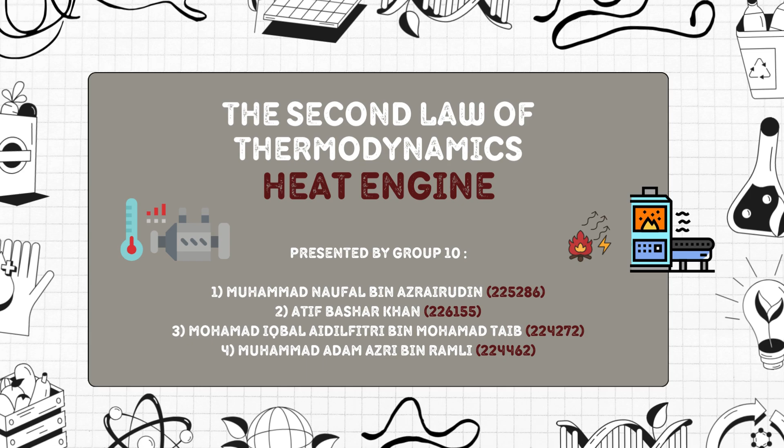So today my friend and I will tell you about the second law of thermodynamics with heat engine. So some of you want to know what is the second law of thermodynamics, right? Let me tell you. So what is the second law of thermodynamics?

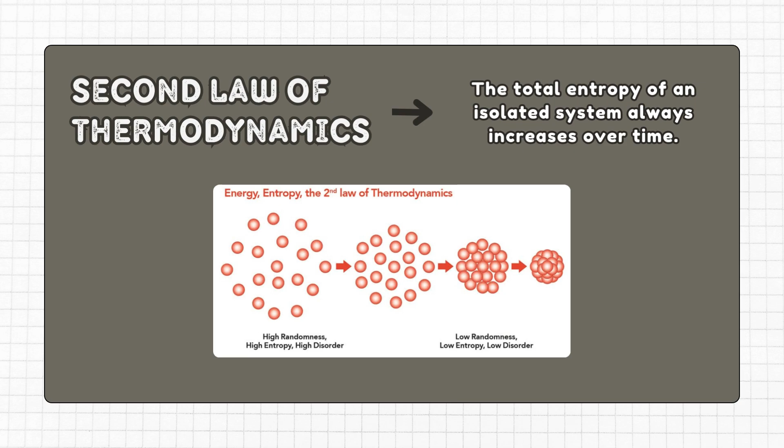The second law of thermodynamics says that the total entropy of an isolated system always increases over time, and energy naturally flows from areas of higher to lower concentration. Energy cannot be completely converted into useful work. Some of it will be lost as heat. Basically, the second law of thermodynamics is all about how energy moves and changes in a system over time.

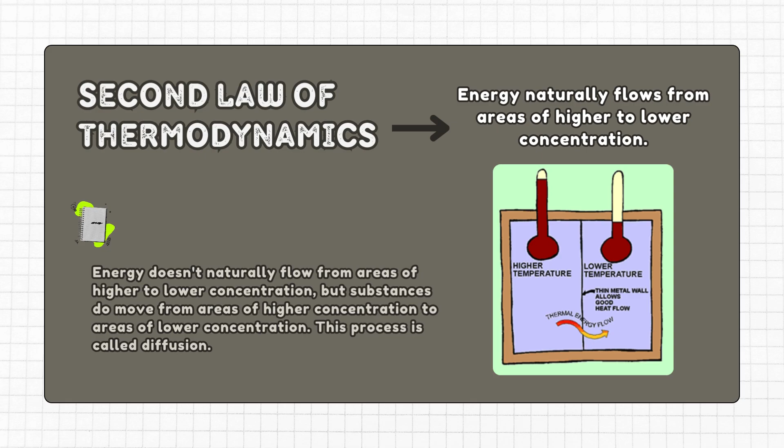One of the major uses of this law is direction of process. By using this law, it helps us to predict how and in what direction energy will flow. For example, a hot cup of coffee cools down to room temperature when energy moves out from the cup. Other than that, the second law of thermodynamics teaches us that energy has quality, not just quantity.

For example, a car battery that has not been used in a long time cannot be used. The energy is still there, but it has changed to waste heat. As for the theoretical limit for engineering systems, the second law of thermodynamics is a major help to solve engineering systems such as heat engines.

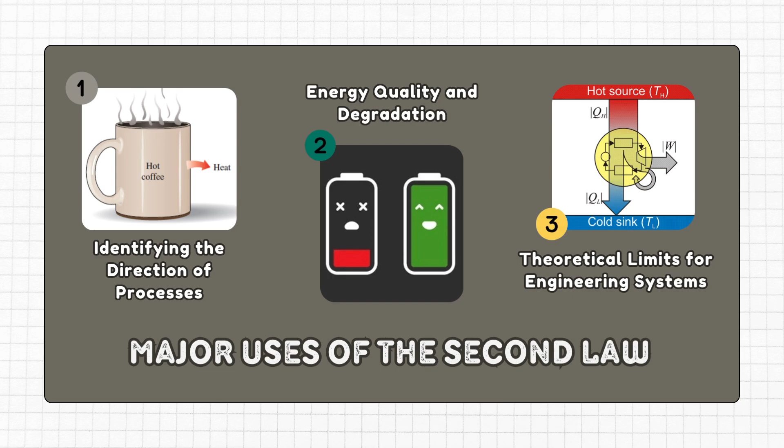In thermodynamics, a thermal energy reservoir is an idealized body with specific characteristics that make it essential for studying energy transfer systems. First, it has an enormous thermal energy capacity determined by its mass and specific heat. This allows a reservoir to store or release large amounts of heat without undergoing any noticeable change in temperature. This constant temperature property makes it a stable reference point for analyzing energy exchange processes.

In practice, thermal energy reservoirs are modeled after large natural systems. For example, oceans, lakes, and rivers act as reservoirs due to their vast ability to absorb and retain heat. Similarly, the atmosphere with its immense thermal capacity serves as another real-world example. These natural bodies are used to simplify thermodynamic models while maintaining practical relevance.

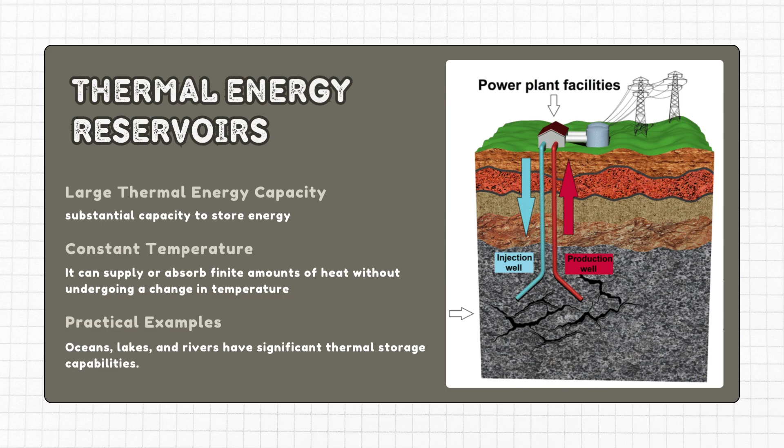Thermal reservoirs play a crucial role in systems like heat engines, refrigerators, and heat pumps. Heat engines, for instance, rely on high-temperature reservoirs to supply energy and low-temperature reservoirs to absorb waste heat, completing the cycle. Refrigerators and heat pumps depend on reservoirs to transfer heat efficiently between spaces. In essence, thermal energy reservoirs are the backbone of theoretical and practical thermodynamics, offering the stability and frameworks needed to analyze energy systems effectively.

Heat engines. A heat engine is a device that converts thermal energy, heat, into mechanical work. It operates based on the principles of thermodynamics and typically involves the transfer of heat from a high temperature source to a lower temperature sink. The key feature of a heat engine is that it produces work by using the energy difference between the heat source and sink.

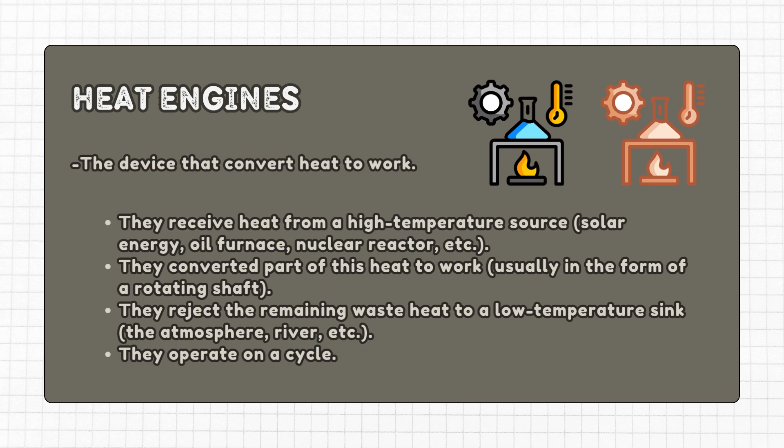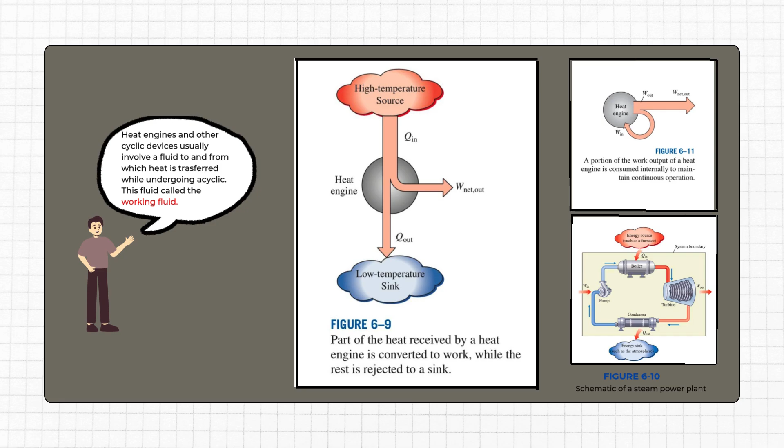Heat engines receive heat from a high temperature source. Heat engines take in energy as heat from sources like solar energy, oil furnaces, or nuclear reactors. This heat is the input energy for the engine to start its process. They convert part of this heat to work. A portion of the absorbed heat is transformed into useful mechanical work, such as turning a shaft or moving a piston. They reject the remaining waste heat to a low temperature sink.

Not all the heat can be converted into work. The leftover heat is released to a cooler place like the air, water, or the ground. Heat engines operate on a cycle. The process repeats continuously in a cycle involving heat absorption, work conversion, and heat rejection, allowing the engine to function continuously.

Now we move to thermal efficiency. What is thermal efficiency? Thermal efficiency is a measure of how effectively a heat engine converts the heat energy it absorbs into useful mechanical work. It is defined as the ratio of the work output to the heat input from the high temperature source.

Maximum efficiency is achieved when QC, which is heat rejected, is minimized, but due to the second law of thermodynamics, no real engine can convert all heat into work. A perfect efficiency of 100% is impossible.

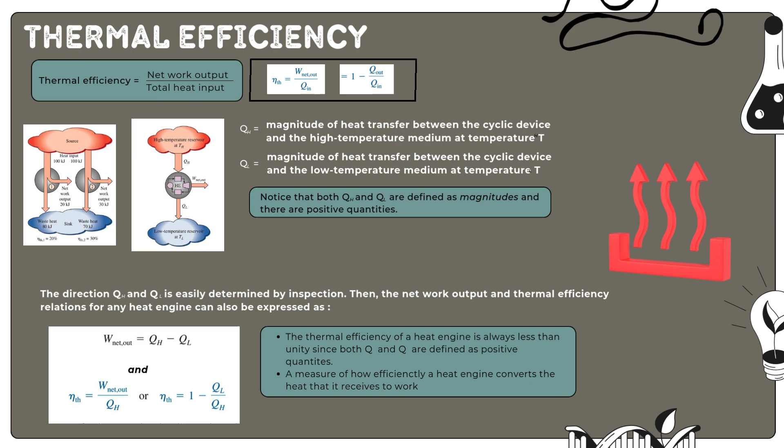Carnot efficiency is the maximum theoretical efficiency of a heat engine operating between two temperatures, TH and TC, which are high and low respectively. The efficiency is always less than 100% due to the second law of thermodynamics, which states that some heat must be rejected to the sink.

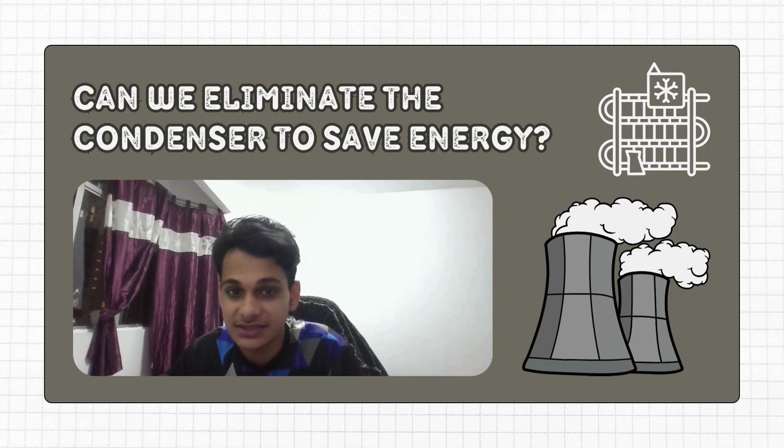In a steam power plant, for example, a critical component is the condenser, which you can see up there, where waste heat is rejected into the environment, typically rivers, lakes, or the atmosphere. This might raise the question, can we eliminate the condenser and save all that waste energy? Unfortunately, the answer is a firm no.

As illustrated here, every heat engine must transfer some energy to a low temperature reservoir to complete the cycle. This is a fundamental principle of thermodynamics. Even under ideal conditions, it's impossible to convert all the heat into useful work. Without the heat rejection process, the engine cycle simply cannot function.

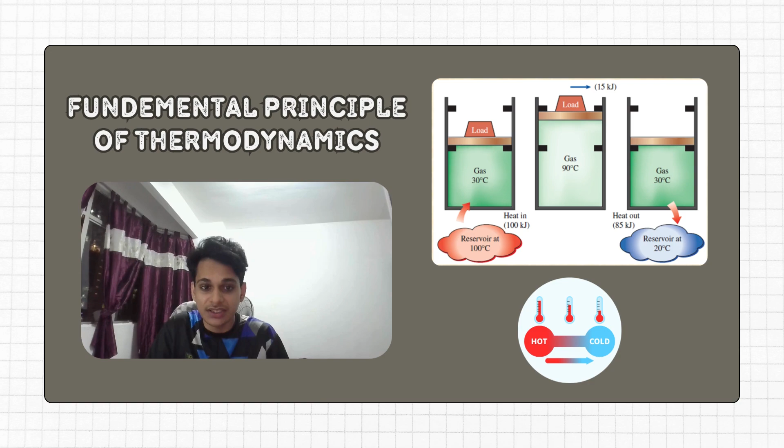So while the rejection of heat might seem inefficient, it's an essential step in the operation of any heat engine. This highlights the importance of understanding and working within the constraints of thermodynamic laws when designing energy systems. So we have learned about heat engines, thermal efficiency, and the second law of thermodynamics. Now it's time to do some questions, and we're going to solve them together.

So for the first question, it says a heat engine takes in 1000 joules of energy at 1000 Kelvin and exhausts 585 joules at 350 Kelvin. What are the actual and the maximum theoretical efficiencies of this heat engine?

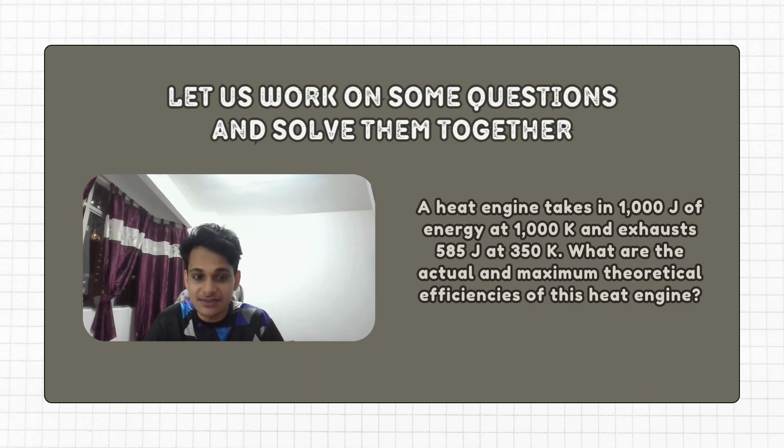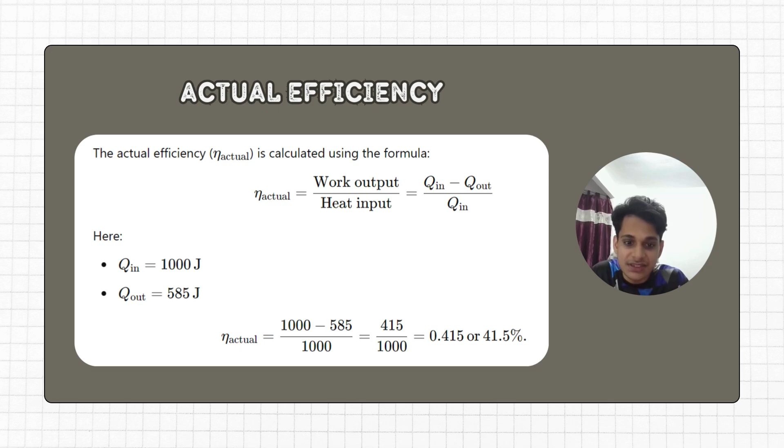Let's find out. First, we figure out the actual efficiency by using the equation, which equates to work output divided by the heat input. Now we can derive the work output to be the energy going in minus the energy coming out, divided by the heat that we have put into the system. Now, if we take the values given in the question, the energy coming in is 1000 joules, and the energy going out is 585 joules. If we subtract and divide it by 1000, we get the actual efficiency to be 41.5%.

So now hopefully you guys have learned about efficiency, thermal efficiency, the Carnot principle, and the second law of thermodynamics. The Carnot efficiency is 1 minus the temperature in the cold state divided by the temperature in the hot state. If we substitute the values given from the question, which are temperature in the hot state of 1000 Kelvin and temperature in the cold state of 350 Kelvin, we get our Carnot efficiency to be 65%, which is approximately 25% deviation from our actual efficiency.

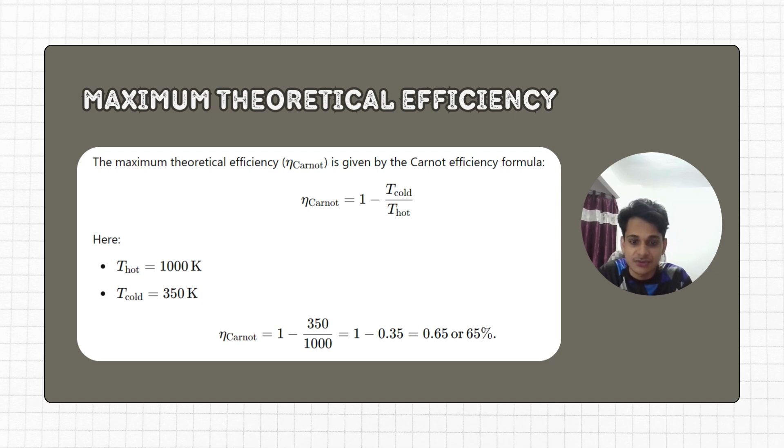So to summarize, a heat engine is a device that converts thermal energy into mechanical work while operating in a cycle. Key characteristics and principles of heat engines include operation. Heat engines receive heat from a high temperature source. For example, this could be solar energy, an oil furnace, or a nuclear reactor. They convert part of this heat into work, often in the form of a rotating shaft, and reject the remaining waste heat to a low temperature sink. For example, the atmosphere, rivers, or lakes.

Secondly, we have a working fluid. A fluid is used within the engine to transfer heat while undergoing this cyclic process. Then we consider the thermal efficiency. This is a measure of the engine's performance, calculated as the ratio of the work output to the heat we have given as input. No heat engine can achieve 100% thermal efficiency due to the second law of thermodynamics.

To state more about the second law of thermodynamics, or the Kelvin-Planck statement, it is impossible for any cyclic device to convert all the heat it receives into work. This limitation applies both to idealized and actual engines. To give some examples, steam power plants are a common example where condensers are used to reject waste heat, completing the cycle. Removing the condenser is not feasible as it disrupts the cycle. The efficiency of a heat engine depends on the temperature difference between the heat source and the heat sink, as described by the Carnot principle.